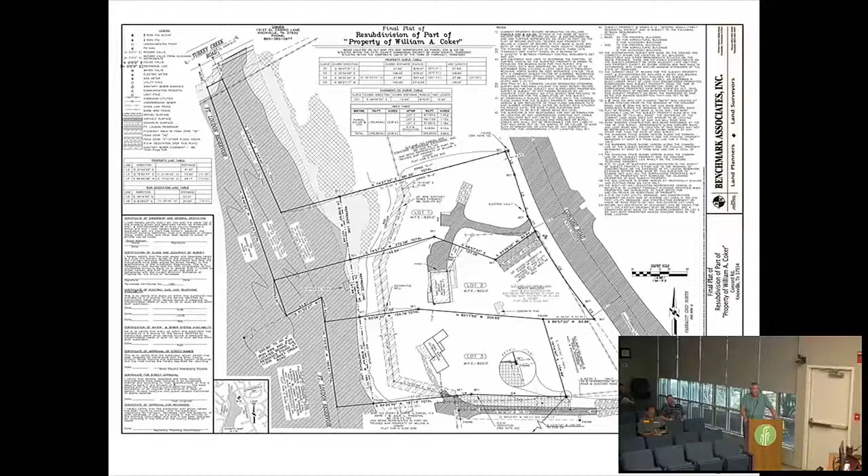But we've resolved that issue. Hopefully the trustee's office didn't have a bunch of back taxes on it that had gotten lost in the shuffle. No, I think this makes sense. This is a good example of reason why there are appropriate times for variances, which this is. I think what Mark said is a very simple re-subdivision of a parcel, and I guess we need to do the individual variances separately. Isn't that right, Mark? Yeah, we need to take action on the variance first, and then we'll review the plat.

First one's the variance for the 10% open space requirement. Is that correct? Yes, sir. All right, I'm so moved. Sorry, what's the second one? That's the only one, variance. That's the only variance on this one.

I guess we're not worried about pedestrian facilities. We kind of got that covered with the new construction. Right, yeah, the Concord Road improvement will have a walking trail on that side of Concord Road. That'll be part of that project, so it's not necessary to request a variance for that requirement.

Three reasons for the single variance: I'd say due to the simple nature of the subdivision, the number of lots, and the size of the lots. It's really not a subdivision that's creating new public improvements. It's really a minor re-subdivision, which the subdivision regulations talk about as being a candidate or a reason for granting a variance from the open space requirement.

Now, one thing on this plat is on Concord Road, the access, eventually it's going to be one access point for lots 1 and 2, the two northernmost lots. They'll come out at that access easement, which lines up with that subdivision on the other side of Concord Road. So that'll all be kind of cleaned up. That driveway that's shown there as existing will be going away before we issue any certificate of occupancy on that lot.

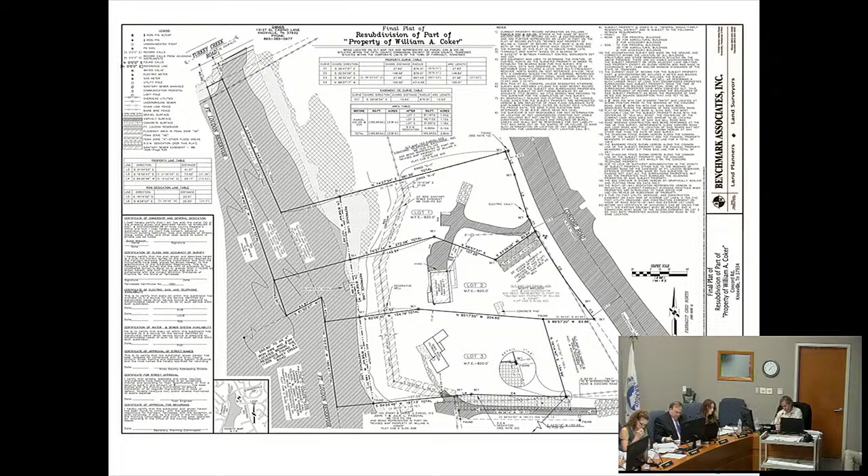Move to approve based on the three subject to's. Second. All those in favor? Aye. Opposed? Thank you for being here tonight. Appreciate it.

Item number 5, discussion and public hearing on a preliminary plat for the Keeney property subdivision, parcel 142.036, 142.0602, 142.0603, 142.0604, tax map 142, 12422 Union Road, 25.74 acres, 6 lots, zoned R-2, urban engineering applicant.

It's currently R2. And the next item on this agenda will be related to this too, number 9. This is an item that was actually postponed last month.

What it involves is a mostly estate-sized lot subdivision off of Union Road, on the east side. The applicant is proposing to plat 6 lots, and they'll be reconstructing an existing driveway that's on the property.

Per the town zoning ordinance, we can't issue building permits for lots that don't front on a public street, so he's having to convert the driveway, which was a platted access easement, to a public street to address that requirement. As part of that, they'll be extending a 6-inch water line along a portion of Union Road and into the property to serve the lots, and to provide for a fire hydrant required per the fire code.

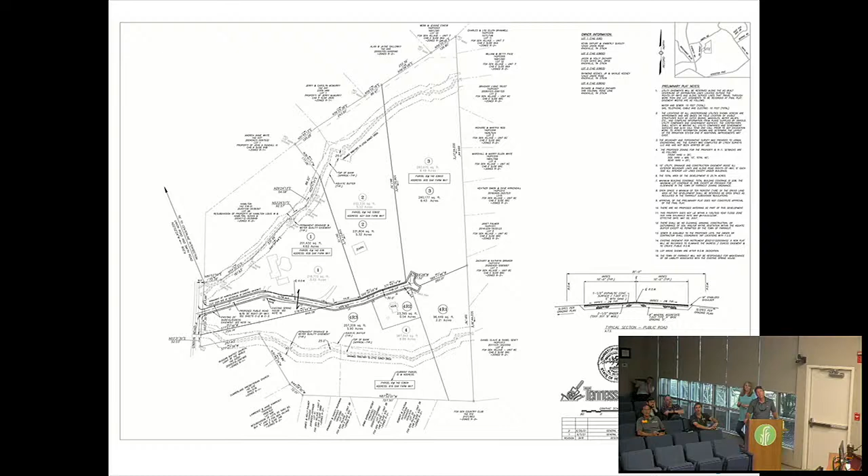I'm going to make a motion to permit a variance from the requirement of a pedestrian facility along Union Road in the subdivision, but including the pedestrian facility easement in the plat, for the reason that it was the simple subdivision, or minor subdivision, of the property. Second. We have a motion and a second. All those in favor?

Aye. Opposed? The next one's the open space requirement, to 10% open space. Staff recommends approval of that, because the way this is laid out, it's kind of an open space by design. You've got generally large lots that have a lot of private open space, and there's a couple of drainages in the development, part of those will be platted as water quality easements. So we feel that the intent of the open space requirement is more than satisfied with this subdivision, so we would recommend approval of that variance.

Move to approve. Second. All those in favor? Aye. Opposed?

Next one's cul-de-sac length. Normally, the longest a cul-de-sac can be is 500 feet, and this one is going to be 935 feet roughly, that's not even a traditional cul-de-sac. But it would only serve 6 lots, and realistically, given the drainages that are there and the fact that pretty much everything around it is already either developed house lots or part of a larger developed piece of property, there really aren't any reasonable ways to extend a street into anywhere. So really a cul-de-sac in this case is the only option. We do support the variance based on the number of lots, the character of the subdivision, and the fact that you have the physical limitations of extending something other than a cul-de-sac in the development.

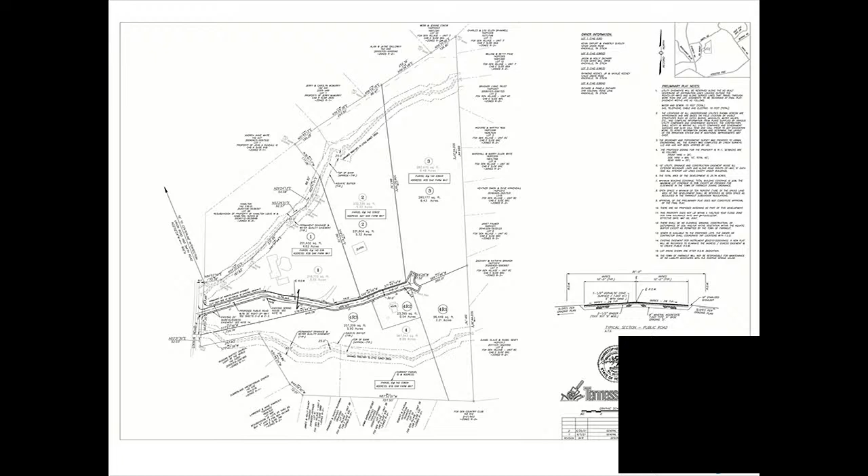From the staff's perspective, I don't think any of these would seem to be significant. They should be easy to address. So we recommend approval of the plat, subject to addressing the 9 items in the staff's recommendations. Okay with that? Yes.

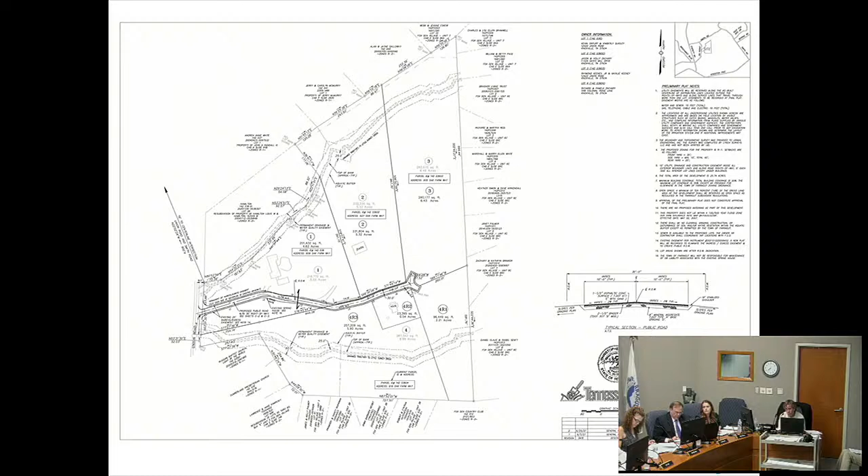Chris, y'all are good with those 9 subject-to items? Okay. I move for approval based on the 9 subject-to items. Second. All those in favor? Aye.

Done. Actually, you can stay up there. Well, for the rezoning if you want. We're gonna do your rezoning next, too.

We're going to move on to item number 9 on our sheet, which is discussion and public hearing on a zoning map amendment for lots 1 through 3 as shown on the preliminary plat for a portion of the Keeney property subdivision, 12422 Union Road, 15.5 acres, to change the zoning from R2 general single-family residential to R1 rural residential, urban engineering applicant.

This request is related to the 3 northern lots that were part of the subdivision we looked at in the previous item. The whole property is currently zoned R2, which is a traditional single-family developed subdivision district — it doesn't have really large lots, and it's not really intended to have farm animals. So the individuals interested in the northern lots have an interest at some point in the future in having farm animals.

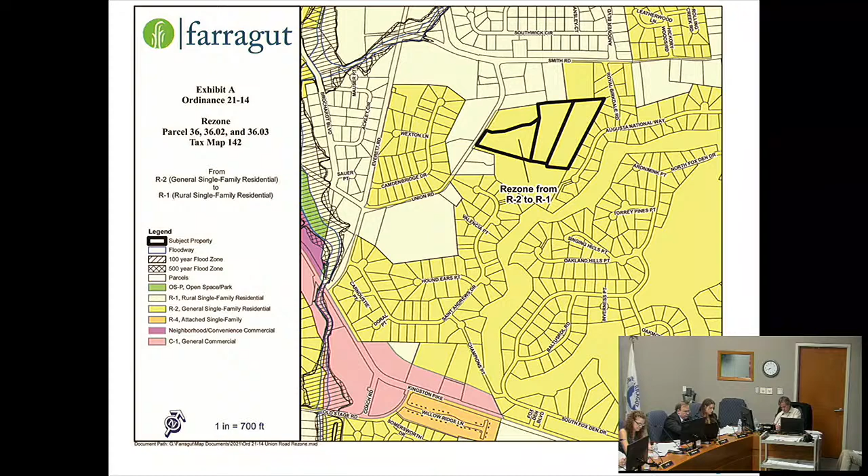Does the applicant have any questions or comments? No. I move for approval of Resolution PC-21-09. Have a second? I'll second. All those in favor? Aye. Opposed?

Thank you for that, thank you. Thank you, appreciate it. Thank you.

Item number 6. Discussion and public hearing on a final plat for Preserve at Turkey Creek, parcels 02103 and 02101, tax map 153, 13 lots, zoned R-2, 10.3 acre survey, LLC applicant.

On this subdivision, one thing just to give you an overview: when we present final plats to the Planning Commission, there are certain improvements that we have an expectation for that need to be addressed from staff's perspective.

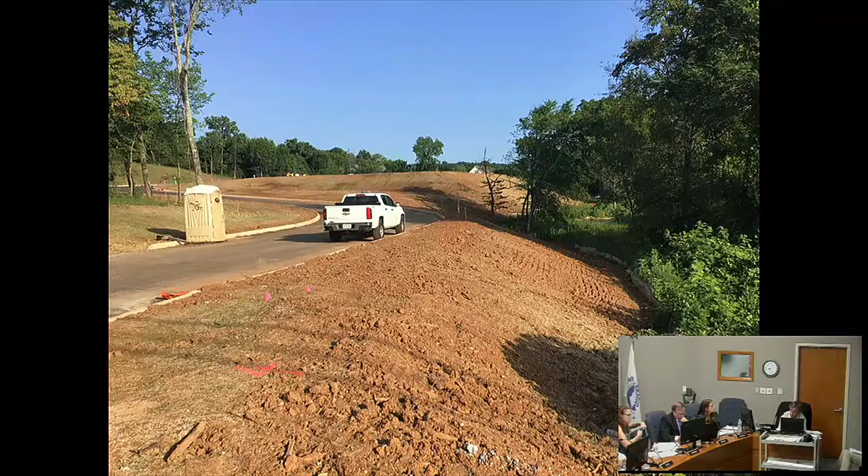One of the things we noted out in the field in this subdivision - this is the former Goins farm, if you all remember that - it's just south of a portion of Inverness subdivision, before you get to Anchor Park, on the north side of Turkey Creek Road.

One of the field-related concerns, and frankly the reason staff is recommending postponement on this item for this meeting, is that the expectation for stabilization - that is, grass coming in - is not out there.

These pictures were taken yesterday. It's a little hard to see. I don't know if y'all have been out to the location. I know they're trying - it's a challenge to get grass to grow in July. Yep, we all know that.

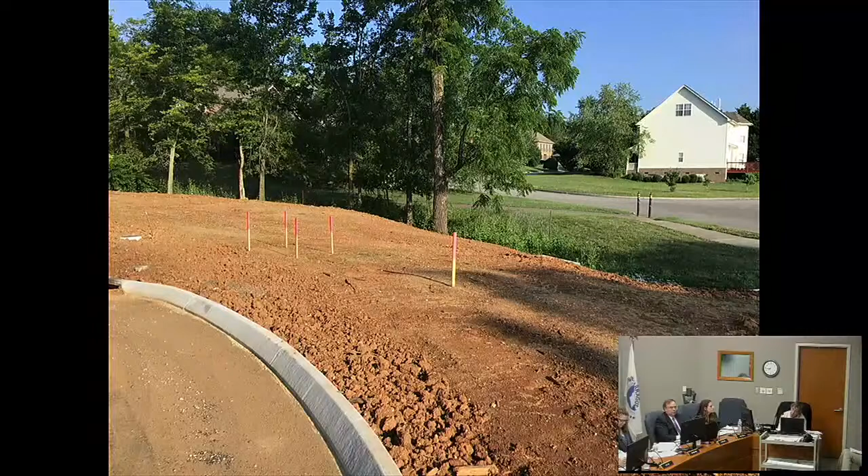But from staff's perspective, we have to try to be consistent, because what happens sometimes is if the Planning Commission approves a plat with subject-tos, the town engineer gets pressured to sign the plat, and really, in this case, it's a little premature in the field from staff's perspective for the plat to be voted on at this time.

I think between now and the meeting in August, hopefully this condition will be satisfied and there won't be anything lingering. But we just have to try to be consistent.

We've postponed a couple of subdivisions a couple of times because of a lack of stabilization. We're not really trying to hold them up. I know they've been trying to get this finished in the last few weeks, with the road and everything. It's not our intent to hold anybody up.

It is our intent to apply certain standards that we've always tried to hold people to when final plats are being presented to the Planning Commission. So it's just a matter of consistency and our understanding of the expectations in the field for these kinds of developments.

July is a tough month to grow grass. We've had more rain than we normally do, but it's hard to get it germinated and up and stabilized. Right, and we empathize with you.

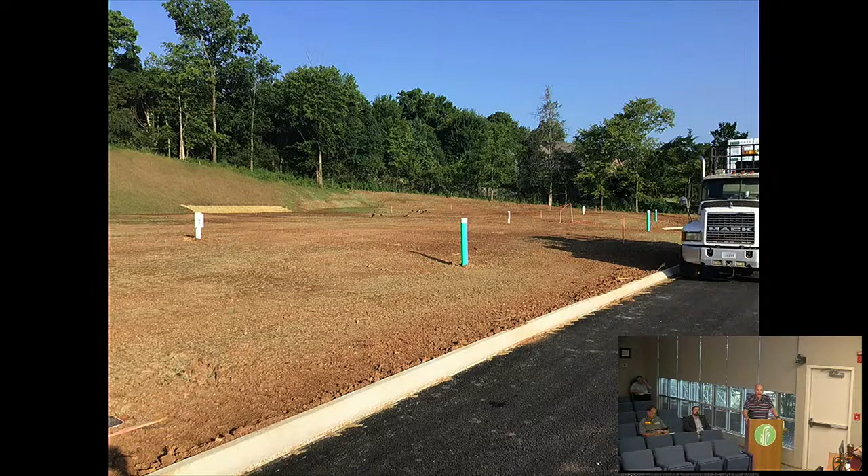With all due respect to staff, and we run headlong into this on just about every project, I know you're trying to be consistent, but that doesn't mean what you've been consistently doing is necessarily correct as far as waiting on grass to grow. The precedent you'd be setting is accepting an extra letter of credit on top of the erosion letter of credit for a site that's already been hydroseeded. So if somebody blows seed and straw, you could say no, you've got to hydroseed it. You're not setting a precedent that anybody can come in here with 30 acres of exposed dirt and post a grassing letter of credit. It's been hydroseeded. Obviously, we put seed and fertilizer in the ground with it. It will germinate. The clover's already coming up, but it'll take probably about another week for it to pop.

Anyway, enough said about that. I just respectfully ask for approval subject to the ten conditions, and we're willing to accept a letter of credit amount to guarantee the grass grows from engineering.

For all those at home, it's not necessarily as much about the grass. It's about not wanting the mud and the silt in the street, the mud and the silt in the stormwater system, and we sure don't want the mud and the silt in the lake, which you guys are across the street of. So you think it's a cosmetic thing? This is not a cosmetic thing, this is about erosion control. And that's why I asked Russ if all the silt fence is up, and he indicated yes, the silt fence is still up.

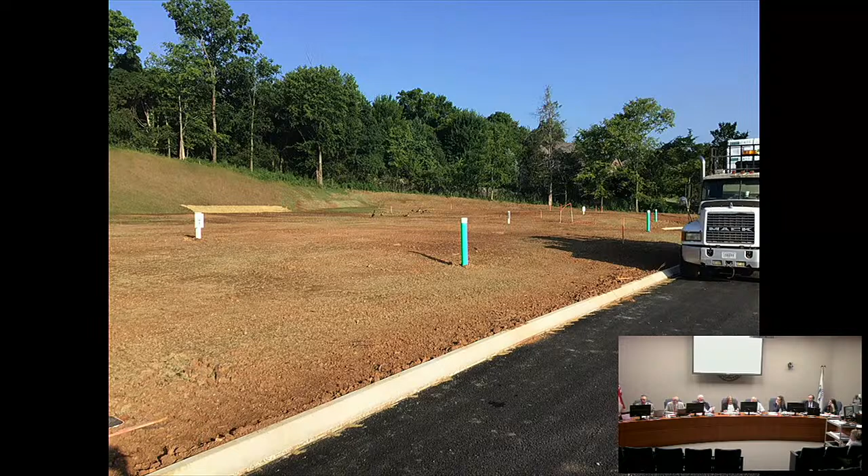I'm kind of with Louise. I'm comfortable with them posting another bond. I also don't want to put the staff in a predicament where, because we rely on the staff's eyes and ears to be able to enforce, for lack of a better word, the rules that this body and the Board of Mayor and Aldermen have put together to protect the residents of the town. So I guess we just need some more discussion. I'd like to hear from the rest of the commission. Is this something that makes sense, or is this a slippery slope here?

Well, let me ask you this question, because I know there's two different things we're looking at. We're looking at the area that's open space, and we're looking at the area where you're going to be building.

Where you're going to be building, you're going to be digging up anyway, so that's another issue. But whether we approve this or not, you've done all you can do at this point, Russ. Is that what you're saying? You've hydroseeded. Absolutely, that's all you can do. If we have a downpour and we don't approve this plat, and we have a downpour and you see some erosion there, that's going to happen whether we approve this or not. Is that my understanding? That's correct.

Recording this plat doesn't change our responsibility for any mud in the street whatsoever, or any mud leaving the site whatsoever. All the perimeter controls are still in place, meaning the silt fence and everything else. So that's where I don't agree with staff's historical process of literally spending the whole wad and then sitting and waiting for grass to grow. It doesn't matter what other people do, but Farragut's the only place that requires grass mowable. We want stabilization, so I understand for obvious reasons. Well, we do too.

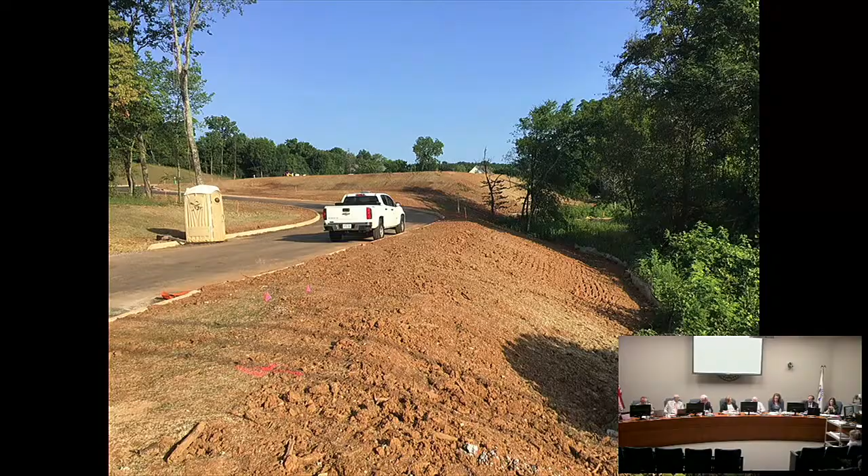Anyone else have any questions or comments? I would just comment on the fact that we're looking at a situation where they've taken the mitigation and we have an additional requirement for the letter of credit. You're literally just waiting for nature to take its course, and I see no reason to hold up. If we feel comfortable with the mitigation efforts and the efforts to date to do the stabilization, and the additional requirements, I think that's going the extra mile in this situation, and I think we ought to go ahead and approve it.

So are we adding an 11th condition then? Yes, for a letter of credit. For guarantee of grass growth, or however you want to call it—stabilization letter of credit, okay. Be comfortable with the 20,000 letter of credit. Well, yeah, that's the purpose of the final plat. It's kind of the carrot and the stick.

If we hold the final plat, that's a heck of an incentive for a developer to hurry up and get those things done. A $20,000 letter of credit is a pretty big stick to hit you with if you don't get the grass growing in a month. Are you guys okay with that? Well, in a reasonable amount of time, obviously. This time of year, if we don't get any rain, you may have to get some water trucks and throw some water on it, or that tender grass that just popped up is just going to die on you.

No, actually throwing water on it will make it die quicker, because it'll come up with a higher water volume than what nature's given it, and then when you don't have it consistently, it'll die. I'll leave it up to you guys and the experts, but I said the carrot and the stick, if you guys are okay with that.

We're with what the mayor said, moving into the end of August and early September - that's the ideal time to start growing some grass, with cool nights and a little more dew. In my experience, that's the best time. Obviously, the reality is that 50% of the site is going to be stripped.

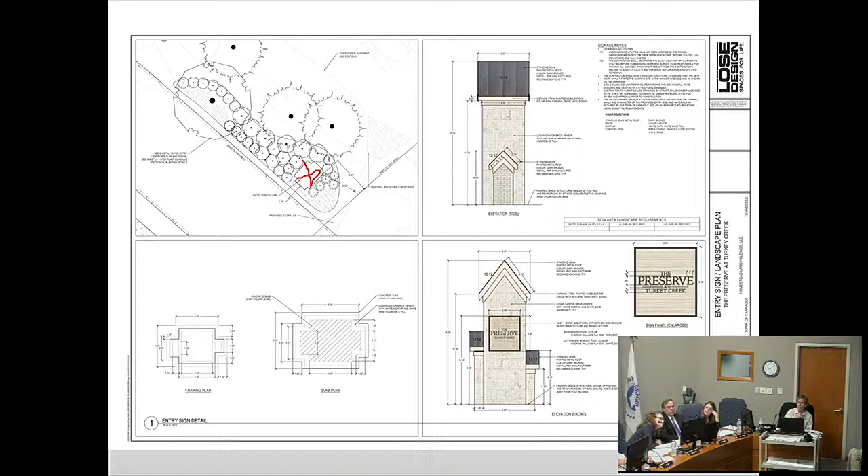Okay, that's where it's at right there, see where that X is? Can you put that on one of the larger plans, go to the landscape plan so I can see it. I'm not sure where we're looking at. I assume it's where you pull in - it's on the right side, you come in, you can kind of see it in the subdivision there.

It was shown on the streetscape and landscape plan during preliminary plat. Obviously the sign design was ornamental - that was one of the subject-tos that y'all didn't actually see. That was a subject to of approval. Mark, run back up to the plat and put an X or a box on what we're talking about here.

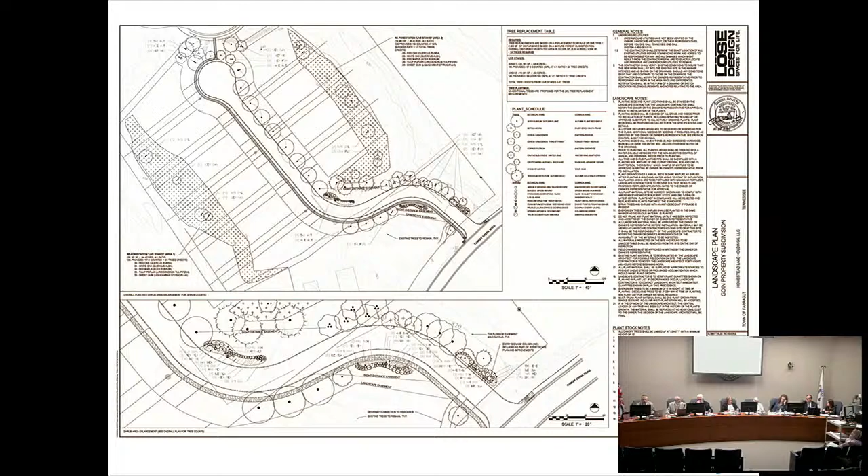I can't read it there. Well, go down - it's the cul-de-sac. There you go. Now show us kind of where we were.

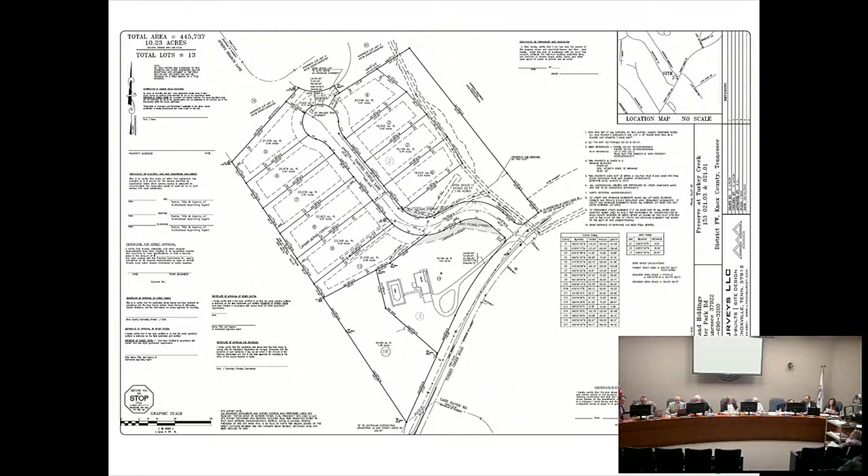I'm seeing what I think is a sanitary sewer easement that runs - that's actually outside the right of way though, it's close, but outside of it. I think that's the other constraint, in this area. That's your problem. The sanitary sewer is married real close to the TVA 820 but outside of it, and then where we have to meet grade of Turkey Creek Road, there's kind of a steep slope, and that's why we're trying to use that shoulder, in that red area, because it's within the right of way, so it's actually inside the line.

It's probably about right there, you can't see it at that scale. So you're squeezed in between the two. Sorry, not there - that was a little bigger one. Yeah, basically you come in and it's gonna be somewhere in that area there.

No, it's closer - is it closer to the street? Yeah, to Turkey Creek. That's the middle of the road, 10 and a half feet. Well, I was gonna say, that's the middle of the road. Yeah.

That's the right of way, not the road. Yeah, that's the road that goes down. Center of asphalt is the center of the right of way, right? No, yes - it's right in there. No, it's 4 feet behind the curb, 10 and a half feet behind - remember Turkey Creek Road's right of way scale. So we're 10 and a half feet behind the Turkey Creek right of way, down 4 feet behind our new curb.

Basically, so we've approved some things similar to this before, but don't we require a plat note that says, hey, if somebody runs over that, the town's not responsible for it? Yeah, I mean, that's something we would need to have on the final plat.

Is that something we're approving tonight? Does this belong in the subject to? Well, it's not in the subject to right now - it's kind of an afterthought, because when the sign was applied for, we noticed its distance, and it wasn't noticed on the streetscape plan when that was reviewed.

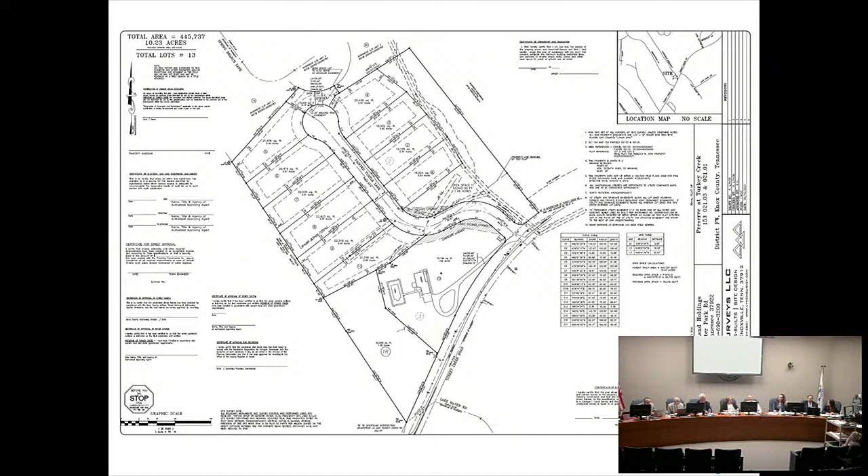What are we normally, like 10 feet outside the right of way? Yeah. Can you go back to the sign? Has VRRB looked at this yet? Yeah, I think it's a good looking sign, quite frankly.

There's no power to it, right? No, there is - just landscape lighting. Yeah, it's a good-looking sign. I don't think that's - so it's a little over 10 feet off the right-of-way of Turkey Creek Road? It is about, I can't read that small number. Yeah, it's 10 or 10 and a half feet behind the right of way.

Go up on that. Basically, I placed it looking at the design speeds and classification of Turkey Creek Road and trying to keep it far enough behind there. And being that our intersection is a stop intersection, the travel speeds will be so much lower that the clear zone of 4 feet behind the curb is enough to clear side mirrors and stuff at those kind of speeds, to cut down on any kind of safety issues.

Normally, when the Board of Mayor and Alderman reviews this, they can impose restrictions or liability language that they may be comfortable with. The town attorney may need to review that before it goes to the Board of Mayor and Alderman.

Now, if you're turning in there, you're going uphill, so it's not like you're coming down to the sign. So it's not really, at least from my perspective, a hazard. If you hit it heading east, it's just going to keep you from swimming because it drops straight off to the lake down there. So if you hit that four feet behind the curb, you shouldn't have a driver's license.

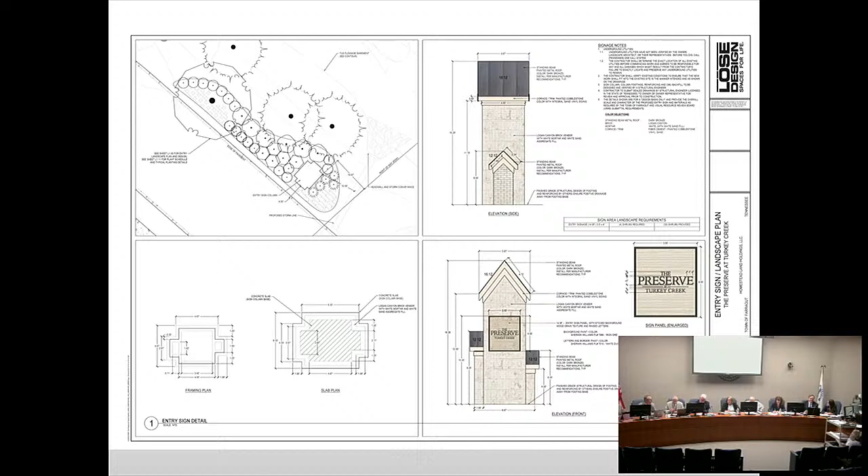Okay, thank you, we'll hope for a light rain. Steady, thanks. For the next one, yes.

Item number 7, discussion on a public hearing on a site plan for Moses Watersports, Parcel 176.02, tax map 130, 11470 Outlet Drive, Zone OD-RE/E, 6.8 acres, Urban Engineering Incorporated.

This particular piece of property is just to the east of Buddy Gregg Motorhome, and that part of Buddy Gregg Motorhome is not in the town, it's in Knox County. So the access is off of Outlet Drive. There will be a request for a variance from the distance between driveways associated with this site plan that we'll need to consider first.

But just giving you a little bit of an overview, this piece of property is in the Outlet Drive Regional Entertainment and Employment District. It's a boat sales business, so they would have boat storage and sales associated with it. Outdoor storage and sales are actually permitted in that zoning district, but you have to screen those areas so they're not visible from public rights-of-way, with opaque materials that are architecturally compatible with the primary materials on the building.

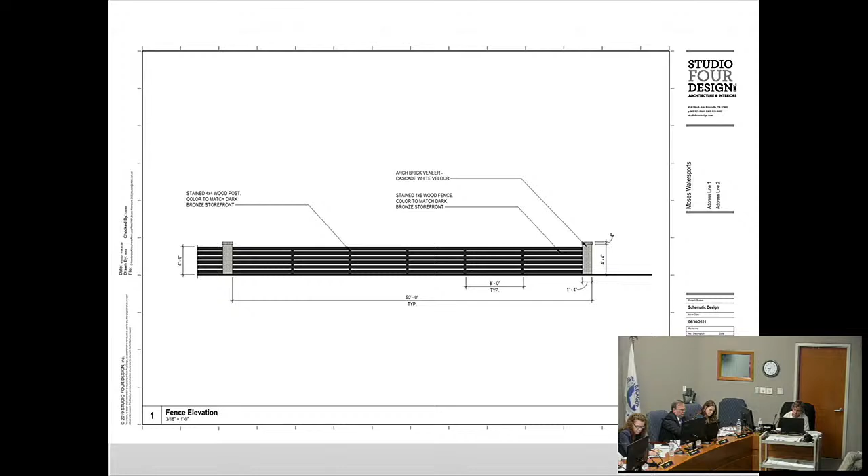There's a little bit of subjectivity in what is architecturally compatible. They do bring in some elements of the primary building materials, but the vast majority of the screening would be a wooden fence. So again, that's something I think you all need to weigh in on and be comfortable with. And I'm not sure if screening would be needed on the south part of the property.

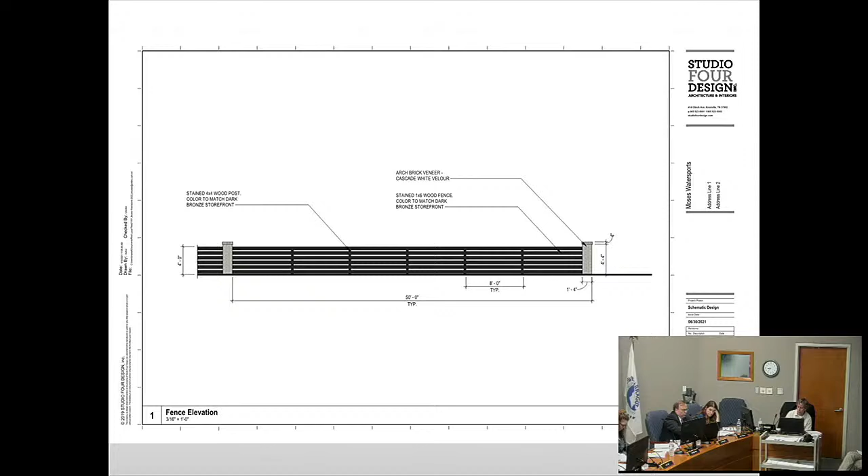Honestly, given the distance between the building or area of storage to the interstate right-of-way, it's about 400 feet, I believe. So it's a pretty good distance, and it may not be necessary back there. They're not showing it back there, they're just showing it in the front at this time.

I mean, are they even going to need it in the front with that sinkhole and all the vegetation in it? The thing is, even though we have protections in place for the sinkhole, you have to consider in the winter it could be more visible, more open, so we have to go with some kind of more or less permanent type of screening that's not dependent entirely on landscaping. That's why that language is in there, that it has to be opaque materials that are architecturally compatible.

Well, you guys probably want it fenced for security anyway. I assume you don't want somebody sneaking on there at night and driving off over the curb with one of your boats. The topographical nature of the property, that's going to be virtually impossible because of the elevation of the property above the road. We'll be able to block the whole property essentially by putting gates across the driveway.

But, because of the sinkhole and the vegetation, it will make it impossible to do anything other than use the driveway of the property, which makes, not to get into the variance we'll ask for later, once again a question of whether we need an opaque material that is going to be blocked by woods anyway.

I think you do. I think it needs to be 6 foot, matter of fact. The fence kind of goes like that. Reason being, sure there's plenty of woods there now, but for some reason or another somebody comes along and cuts that, then there you have it. They do get fined for that. Sure they do, and they pay it and smile and go on.

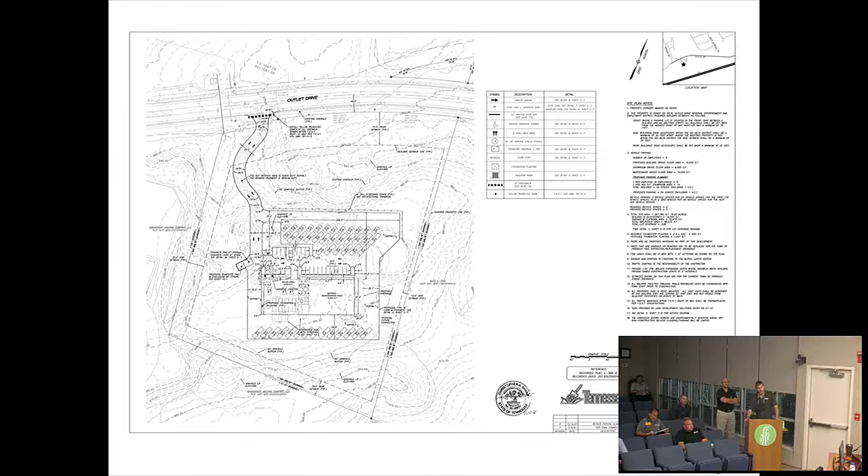Well, I'm looking at the drawing here, and it looks like the road is at 970, that's what I got. And it looks like where the fence is, it's 990, 989. So it looks like we've got quite a bit higher, about 20 feet higher than Outlet Drive.

And again, I don't know the specifics, so I'm inclined to agree with Commissioner Myers here that we can take a look at that at a later date. He's offered to look at this line. So I'm open to consideration.

I am too. I'd like to see something sketched out to understand the concept, but we'd like to see you put it in dimensionally, CAD scaled, and get the distance and the vertical correct instead of us just kind of guessing about what the angle is.

And that's what I'm doing now. I guess you guys aren't building this fence anytime soon. I assume what you want to do is be able to get eligible for a grading permit and start moving some dirt. So what happens with this fence tonight, it's not going to hold you up.

But you can lay it out where you can show the center line of the road, and the angle, and you can even block in a block that represents a boat. We can see an accurate profile. We did the same thing on Horizon Plaza with the dumpster screening.

Anybody else have any questions or comments?

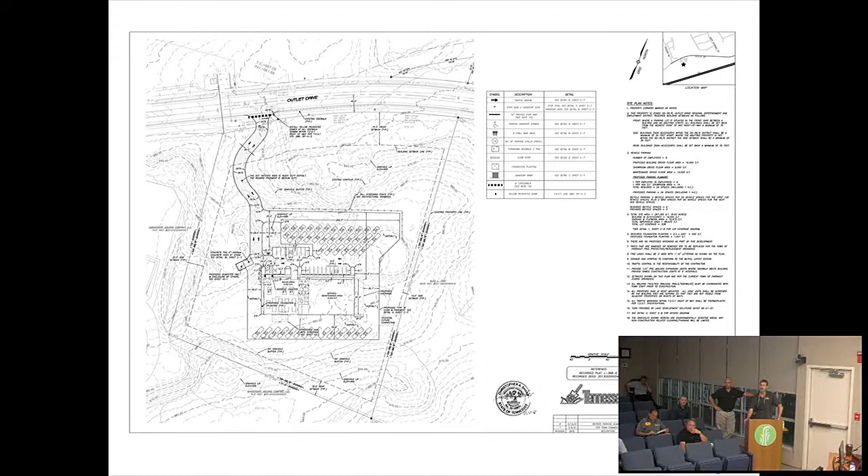It's something that needs to be addressed pretty soon because we need to have a complete site plan set before we issue a grading permit, really. And that's, to me, a really important component of the site because it's a real important requirement in this zoning district for outdoor storage and sales, that you provide for the screening of those areas, because in most areas of the town that's not even allowed.

Yeah, we've stuck with screening all across the board. We did with Home Depot, Gander Mountain, and everybody else. So to back off on that, I'm not comfortable. I'm not saying I'm not willing to throw out a screening requirement at all.

I'm just saying, for instance, with the size of the John Deere dealership, we said, all right, let's try to find what the middle ground is. It still meets the intent and still allows them - obviously you're selling boats or tractors, to a certain degree you want people to see them, but yet we have screening requirements.

I guess what I'd like the applicant to know is we're open-minded to this. You might come back to us and we say, well, gosh, you've got to have 8 feet of screening, so just keep that in mind. There is a little bit of risk here because of our screening requirements, depending on the use.

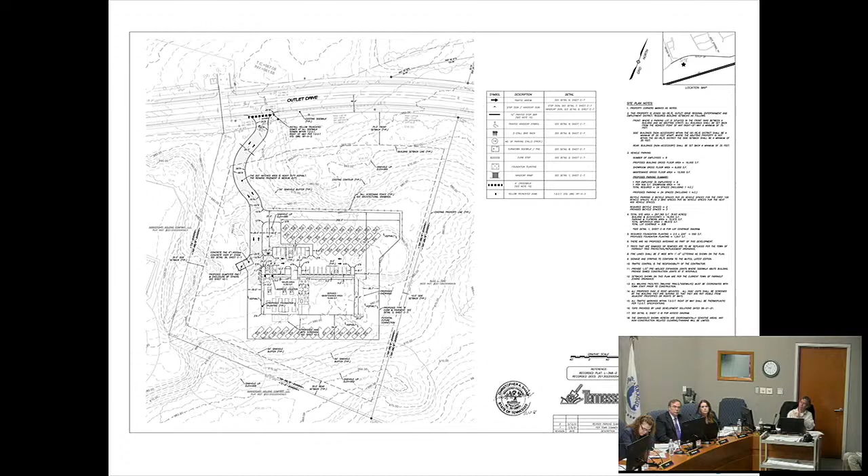Of course, if you didn't have the outdoor sales here and it was just a parking lot, you wouldn't have to have any screening requirements. Obviously, you're being very transparent up front with us about what your use is for this particular building, and so we're telling you up front, hey, there's some screening requirements when you've got merchandise, whether it's boats or pallets of mulch or tractors.

If it's outside, there's some screening requirements. All we need to see is the actual data to make a decision on. It's not a matter of their screening or no screening, it's a matter of the height of the screening. And without that data, I'm not willing to guess one way or the other yet.

I agree. But what I think you're generally hearing, at least for most of us, is that we may get you approved tonight. That way you guys can go and work on your subject-tos and your revisions, and get you these other things with the screening. But it gets you one step closer to hopefully getting eventually across the finish line.

What we need to do, I mean, I can have a line of sight profile to you all tomorrow. But we don't want to wait a month for a grading permit.

I suspect, as you can see, this is a sensitive area in the town of Farragut. No, I understand. I suspect staff's going to want planning commission to be involved with this. This is probably not something that staff's going to be comfortable with trying to say yes or no to, the 20 feet of topography change and the screening material, et cetera. So it's probably going to have to come back to this body.

So what would this body feel comfortable with, the understanding that if I can demonstrate that our 4-foot fence is fine, then can we amend an approval? I don't know how that works. Well, I think we're going to have to.

I think all of us, at least myself, I'm a visual person. I'm going to need to see that, and we obviously can't vote unless we have a called meeting. We're not too excited about having a special called meeting.

I don't know, and Stacy could speak to this, but as far as a cap on the building, or what they're proposing there, I think there's some coping along the top, but you might want to speak to that a little more. Yeah, I think what we're trying to do there, Mark, is similar to what we've done with other buildings that have been approved, just have a really heavy contrasting coping line across the top of the building, similar to what we did at 35 North and Horizon Plaza, that's hopefully going to be under construction soon.

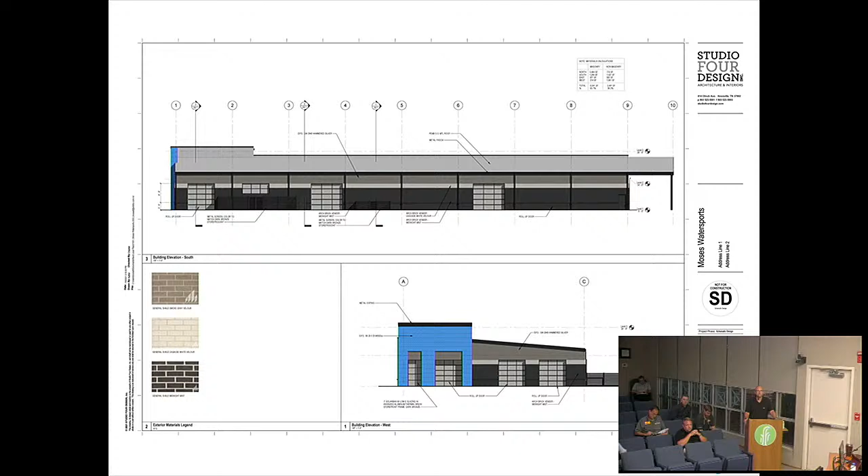It looks more substantial on top of this lower section than it does on the front section. Yeah, that may just be the way the rendering's translating. If you look at the brick colors that are actually the samples on the lower left-hand side of the drawing, they're much lighter than the way it's rendered.

Is this building going to have signage on it, or what are we doing here?

Yeah, I think they designated a general area, this rectangle box, that's kind of where they're thinking about signage, which is good. I'm glad they're thinking about it on the front end. Of course, it's this general area here, and that'll be a completely separate review and approval process, but physically it looks like that would be an area where you could fit a compliant sign for sure.

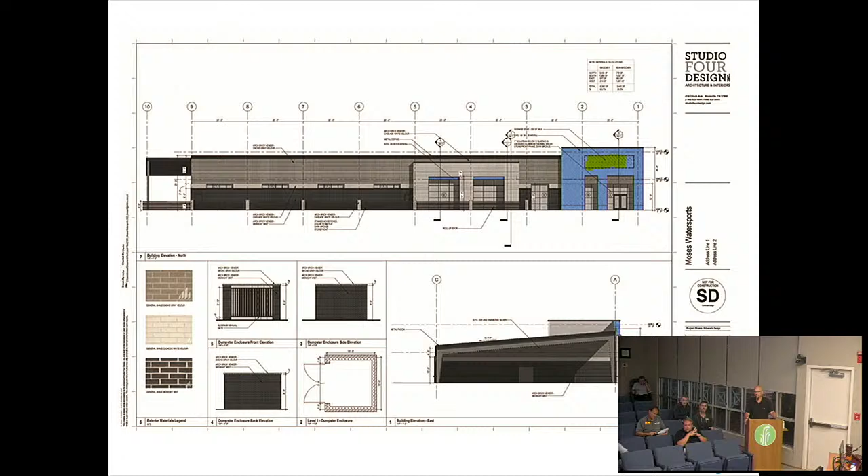I think that diagram represents the calculation we thought would fit per the ordinance, Mark. And that's good, because we're trying to encourage applicants in the sign ordinance to think about all signage on the front end, instead of it being kind of an afterthought, like the landscaping sometimes is as well. So that's good.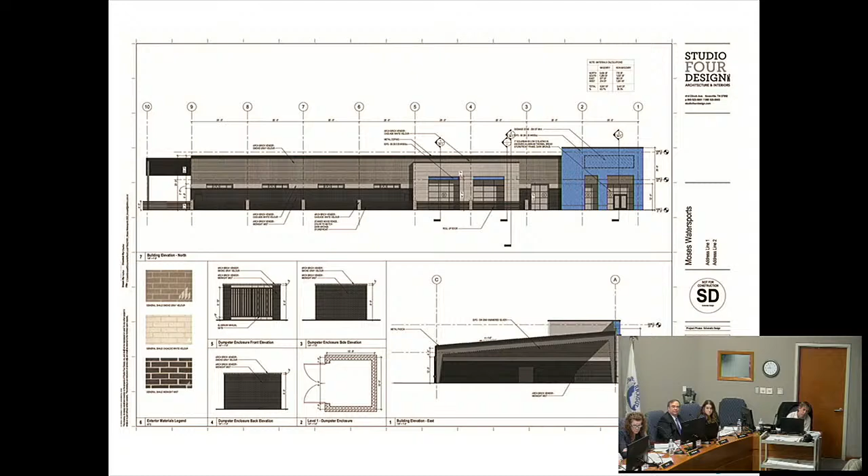Get your dead wood back there, behind that. Give you guys something to attach to. Use plywood or something, like 3/4 inch plywood.

It's expensive stuff now. Some of this will have roll-up doors on the different parts of the building, to kind of break it up across the length of the building.

So I assume no one has a problem with this iconic element, the architectural design standards? Everybody's fine with how it looks. Good.

Something we don't see there is the heat and air units. Is this going to be open garages except for where the blue's at? The side to the far left is the service area of the building. The mechanical units are all on the ground on the back side, package units sitting low on the ground. Nothing on the roof.

I think they're right here, if I can highlight it. They're under that overhang. If you look at that elevation on the lower right, it's the far right end, kind of where the lean-to is back there. That's just a covered protrusion, looks about 5 feet tall. That area is not where the units are. They'd actually be on this back elevation, in between the openings, sitting on the ground on concrete pads.

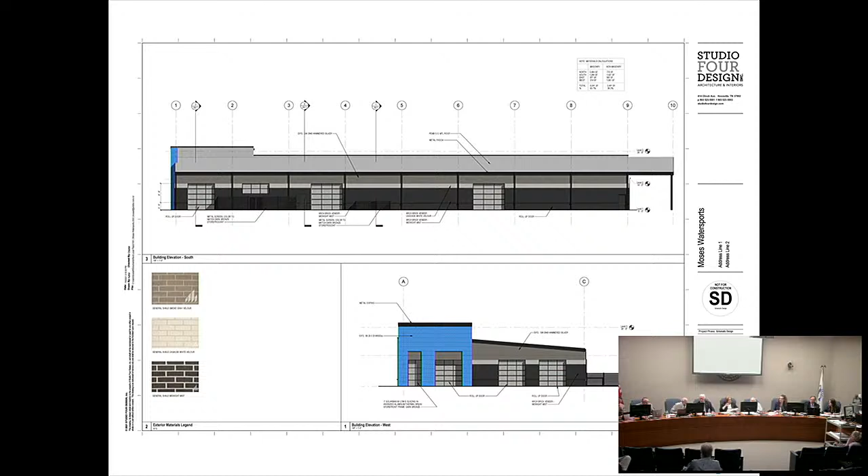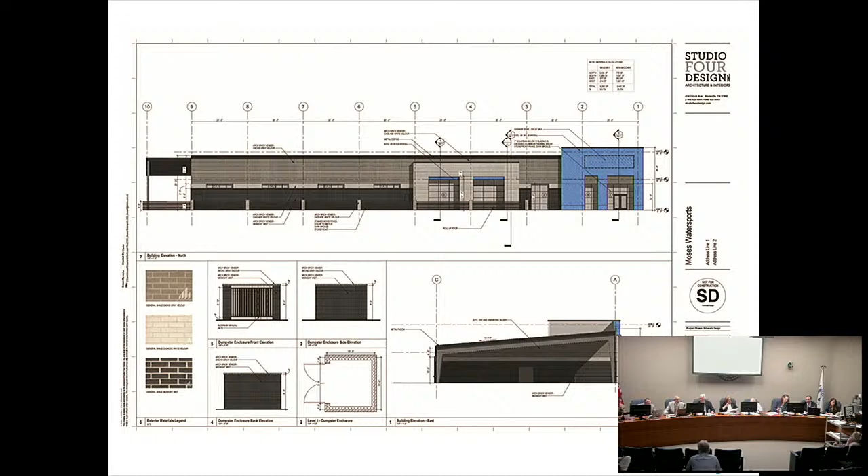So they'll be screened then, obviously, you won't see them from back there. Yeah, that's true. And quite frankly, if they can put them on their site and they're not seen from adjacent parcels or adjacent right-of-ways, I don't care where they put them. That's the requirement, they can't be visible from adjacent properties.

I couldn't find them. Can you show me? Yeah, I think we can see that. Found it over here, it's not on the one they sent us earlier, that didn't have this package on it, but it's on this later one. It's on the south side of the building, the HVAC, yeah, we see them there now. It'll have fencing.

So are we ready for a motion? Aside from number 10, which is the screening of the storage areas, we remove that from the subject twos, because it will be discussed next month. You may need to leave it in the subject too, with height to be determined. So I'm going to amend number 10 to say height to be determined by a subsequent planning commission meeting, the August 2021 Planning Commission.

Chris, you comfortable getting some of those cross-section line-of-sight drawings from all directions where it could be seen? I don't know what can be seen from Buddy Gregg, on that side it wouldn't matter anyway, but on the freeway side, if somebody was to cut those trees, we want to make sure that's not visible.

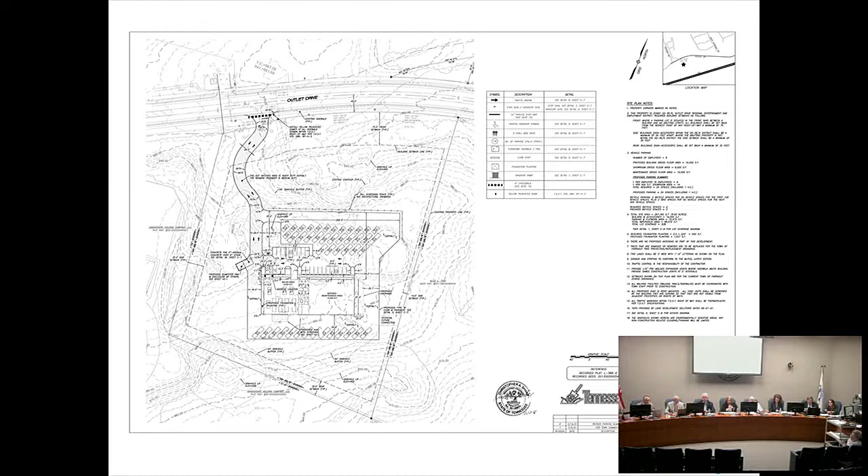We're moving on to item number 8, discussion on a request to consider the site-related elements of expanding the dining room by approximately 500 square feet at Big Kahuna Wings, 12828 Kingston Pike. This is for discussion purposes only tonight. Yes, it is. Hold on one second, let me get to that. Big Kahuna Wings there.

This is basically a discussion to get some feedback related to parking. The owner would like to expand the dining area at Big Kahuna Wings, which is at the southeast intersection of South Hobbs Road and Kingston Pike.

The parking and loading requirements in our zoning ordinance for restaurants call for 1 space per 100 square feet of gross floor area, and 1 space per 200 square feet of designated outdoor dining area.

The gross floor area in this context includes accessory buildings. This site has 2 buildings on it: the main restaurant on the west, and another building to the east that's about 1,400 square feet. When we talked about this at the staff developer meeting, it's our understanding that the building to the east is not really being used as accessory to the restaurant, so that's one thing to talk about a little later. It's apparently just a building being used for personal, unrelated storage at this point.

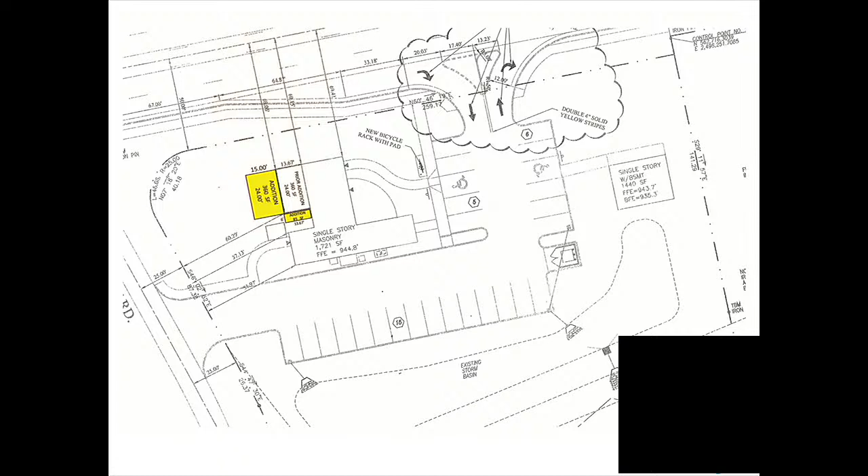First of all, I have a question. I'm trying to figure out which drawing is best, I guess the one you have up there now. If you look at the new addition, 360 square feet, and just below that there's another little square, that's another addition area. Those two together make up the 445 square feet. No, directly below there's an unmarked square, and I think that's a refrigeration area or storage area. So I guess I need to know what that is.

It's Matt Beeler, 12828 Kingston Pike. That's not something you occupy, though. It's a refrigeration unit, like an air conditioner. So it's not part of... I would consider it part of the square footage for the restaurant. No, well, I don't know, that's a good question, I have to look at it. It's an outbuilding that goes all the way back to Ott's.

And I'll make a quick public statement: unlike the last time this property came before us, I do not have any ownership interest in this. I sold this to Mr. Beeler, the applicant, a number of years ago, so I have zero interest in the business or the real estate. But anyway, that little building actually goes back to a little storage building that was there for the past 30 years, from when it was the old Ott's Barbecue. It was just a little shed on a concrete slab.

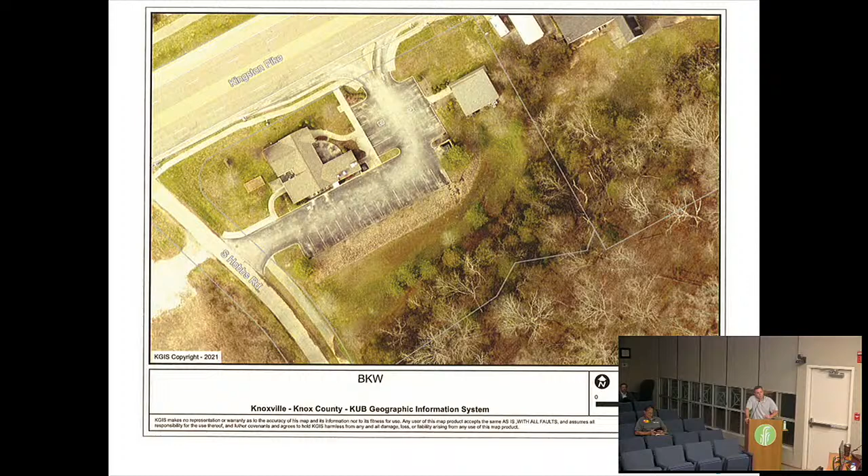If it's being used as an accessory to the restaurant, then it would count toward gross floor area. Refrigeration would be? Yeah, because that's area devoted, accessory to the restaurant. How would that be different from an air conditioning unit, or a heat pump or whatever? Well, I may be confused, it's a mechanical piece of equipment.

Maybe I'm confused. There's a little raised flower bed in that aerial photograph, and an area adjacent to that sidewalk that's a little refrigerated unit. Is it covered and enclosed? It is enclosed, you can walk inside of it, like a little covered walk-in refrigerator storage unit. If it's covered, it's part of gross floor area. It's not covered though, well, what he's saying is it's under a roof. It's not under a roof, it's just the unit, just the box itself. Correct, if it's just a screen wall, then it wouldn't be.

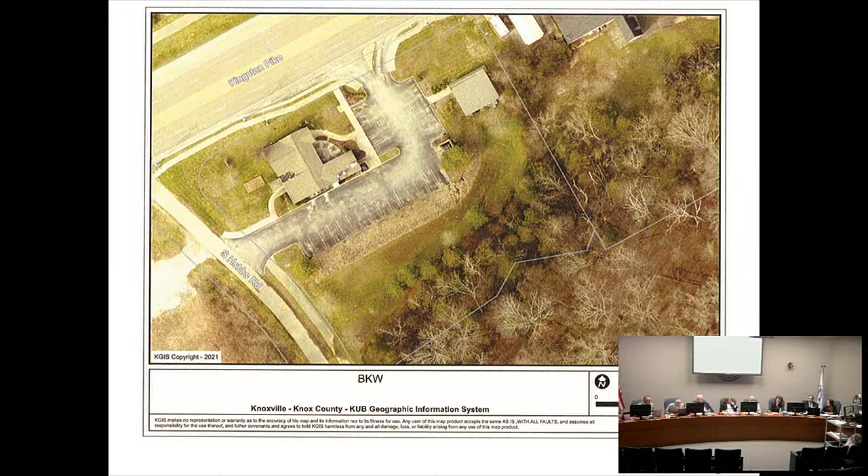So in my consideration for this, the accessory building is what is most important to me because it's literally personal use, not used at all for the restaurant. The restaurant staff doesn't do anything over at that building. Unfortunately, it's on my land and there's not much I can do about it, but it has nothing to do with the restaurant. And I understand we have a parking issue - I'm very thankful after the last 18 months that we do. But if we meet the technical requirements for parking, and that building is not an accessory, then why do I get punished and have to spend a bunch of money to pave a lot that's not even mine?

I agree with you. You are meeting the requirements of our parking ordinance - one spot per 100 square feet - and you have the parking spots to address that. If you were opening and we didn't know this, we would be permitting you to build this. If you had just bought this whole property and said, I need this much square footage, and we said you've got enough parking, you'd go for it. You're not going to be using that building - that's a personal use building. It's not used as an office, it's not used for anything but your own thing. Maybe just storage, isn't it? Yeah, yep. So I don't have an issue with this.

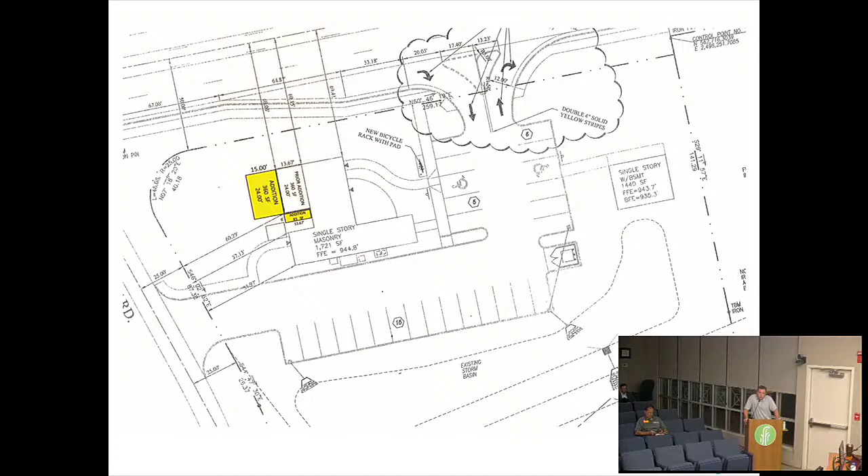Anybody else have any questions or comments? I think he's looking for direction from us, because I guess this comes back as a site plan, but he needs to know how you guys feel before he starts spending money. So he needs to hear from the planning commissioners - where are you on this idea? Because it's expensive to put site plans together, and he's a small business owner, so he needs direction from us.

Well, I think you covered it. He's not using this single-story accessory building as part of his restaurant. It has another usage, personal usage. So, with that said, the parking's sufficient for what he's asking to do, in my opinion. I agree, concur. Yeah, I agree. I do too.

Keep in mind, Matt, if you wanted to lease out that little building, the old grooming shop building, this would prohibit you from being able to lease it out to a tenant. Quite honestly, that was what I thought was going to happen when I bought the property from him, but she moved out just before then. But at this point, the restaurant's the most important thing, and after everything that's happened, I've got a closed restaurant in Chattanooga I'm trying to pay for, and thankfully we've got two here in Knoxville that are still open. The focus is the restaurant, and if I had enough money, I would literally gut the whole thing and start over, because 50 years of different builds created an interesting building, but it's iconic, and thankfully people enjoy coming in. So for me, that's all that matters.

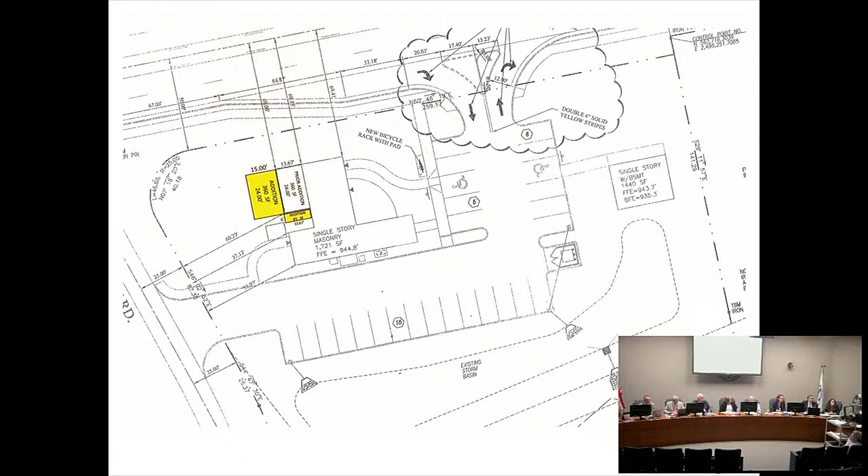And I'm happy to do the site plan. I just want to know for sure that I'm approved, that building's not an accessory, and I'll put forth the money pretty quickly. We probably just need something with the site plan that notes that building cannot be occupied and cannot be used as an accessory to the restaurant. Be real clear about that. And you're fine with that? Yes. Stipulation? Okay.

If it's my personal use building and I'm the only one using it, that doesn't matter, correct? To me, it doesn't, because as long as you're not trying to put customers over there, or tenants in there, or serve food over there or anything like that, so I mean, I have no problems with that.

That building doesn't have a garage door or anything like that, does it? Just curious. You got something you need to store? I'm trying to get it out of there. I started to say, I'm nosy, what have you got in there, but just personal. Hot sauce. Well, restaurant equipment tends to continue to gather. We tend not to throw it away in case we can use a part off of it or something, which actually usually never happens. And the rest is, unfortunately, as all of us humans are, we tend to start collecting stuff. My house isn't big enough, and my wife won't allow it, so thankfully I have the building to be able to use it. I need one of those. Me too.

So this was just for discussion, so I think you have an answer. You have direction now? Confident to go. Yes, sir. I'll get site plan going. And again, I just didn't want to spend the money on site plan if that accessory building was going to be an issue. So I appreciate your time. Thank you. Thank you, Matt. Thanks.

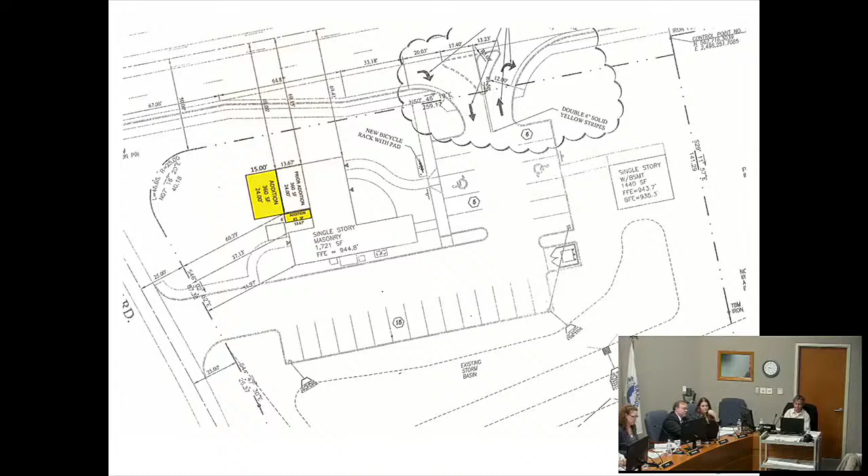Item number 10, discussion and public hearing on a future land use map amendment. Request for a portion of the property referenced as Parcel 069, tax map 142, north of Old Ingles Building, 20 acres, to change the future land use map from medium-density residential to high-density residential. Horne Properties Incorporated, applicant. Do you have some people that want to speak on this?

Just as an overview of this particular request: this is a request to change the future land use map for part of this parcel. This is a 41-acre piece of property, and the request is that it's all currently designated on the future land use map and our comprehensive land use plan as medium-density residential. That basically covers areas identified as maybe being appropriate for densities of 6 to 8 dwelling units per acre. So their request is ultimately to rezone, in the next item, the lower or southern roughly 20 acres of the tract to R6, which is multifamily residential. That district provides for potentially up to 12 dwelling units per acre, which would exceed the prescribed density associated with the current future land use designation of 6 to 8 dwelling units per acre. So to be consistent, we suggested the applicant needed to at least try to change the future land use map so that if they were successful, the future land use map would be consistent with their zoning map amendment request. The future land use map would need to be high-density residential for an R6 zoning district request.

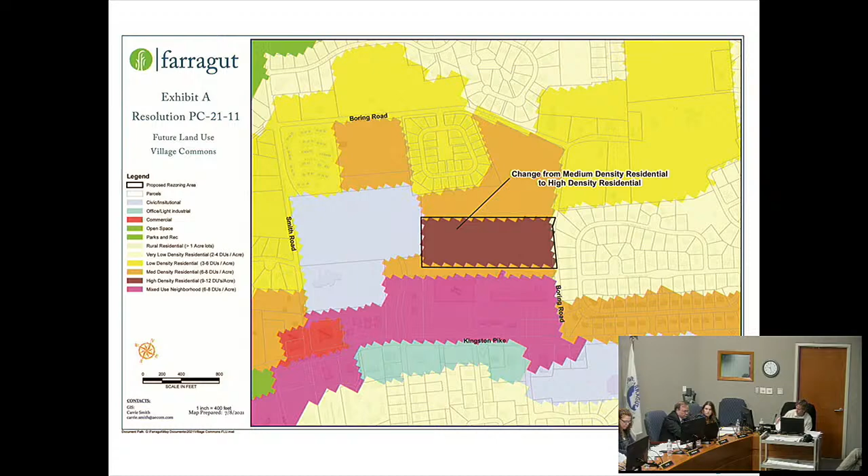Anybody have any questions on that? Let's hear the list of the people. Does anybody have any questions or comments for Mark? Yeah, applicant's here. Obviously related to the next item too. Is the applicant here? Yes, ma'am.

Good evening. My name is Michael Patterson. I'm the Executive Vice President of Horne Properties. Our address is 412 North Cedar Bluff Road. I have with me tonight John Wright. He's been the development manager on this, and the two of us have kind of been working this hand in hand with Mark over the last several months.

It's interesting, John and I were sitting outside just kind of discussing this, and as I sat there and thought about this particular application in front of you all this evening, I thought to myself, you see in life how things just kind of come full circle, and this is kind of one of those moments for me. I've been with Doug for almost 25 years now, and in 2010, we sat in his conference room at Cedar Bluff, and the Planning Commission then had put together a committee.

And at the time, they were developing a land comp plan that was going to be the guide and benchmark for things to come in this city for the next decade or longer. And they were kind enough to come and meet with Doug, because Doug's a large property owner here in Farragut.

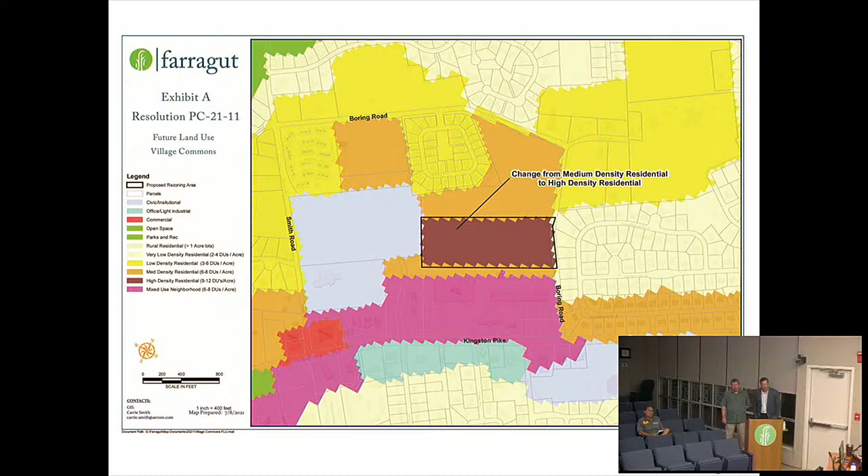I'm just going to provide a little more history. In 2017 we started the Comprehensive Land Use Plan Steering Committee update. Per our policy number 2, adopted with the original land use plan, the Comprehensive Land Use Plan should be updated as often as necessary to remain current—even if no major changes occur, it should undergo a major review at least once every 5 years. It was adopted in December 2012, and we revisited it around mid-2017.

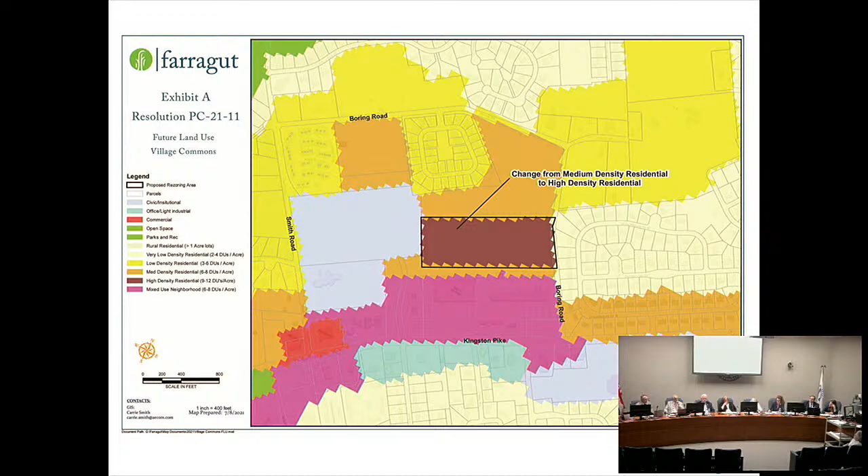We decided to revisit it in certain corridors—we got through Watt Road, Snyder Road, and McFee. In those conversations, medium density being 6 to 12 units per acre was something a lot of residents were concerned about because it was such a wide density range. That's where that was inspired from, came from feedback, and we amended it at the Planning Commission level as one of our text amendments, along with some map amendments. So just so you have clarity about where that was inspired from.

I think it's responsible of any municipality to relook at these things because growth—especially in Farragut—we've seen a number of people moving in here.

I know in my own neighborhood, I see a lot of California tags and New York tags, so I think that's ultimately a responsible part that you all took. And you mentioned 2017, so here we are almost 4 years later, and it's almost like, well, let's look at it one more time.

Not the 41 acres, but just the 20. And now that we kind of have a vision, whereas before, you throw this blanket zoning on it, but there's no planning from the landowner. And again, we're developers here, we're not landowners, I want to make that clear. We own it, but we develop properties. Doug's developed over 22 million square feet of commercial and thousands of acres of residential.

As times change and communities evolve, you go in and say, okay, this is a need here. And we truly believe that. We've got people from really all over the Southeast calling us, saying hey, we've got this senior development idea that we'd like to do, and we'd like to partner up with you. So we think there's a need here. We truly do. We wouldn't be here before you tonight if we didn't feel that way.